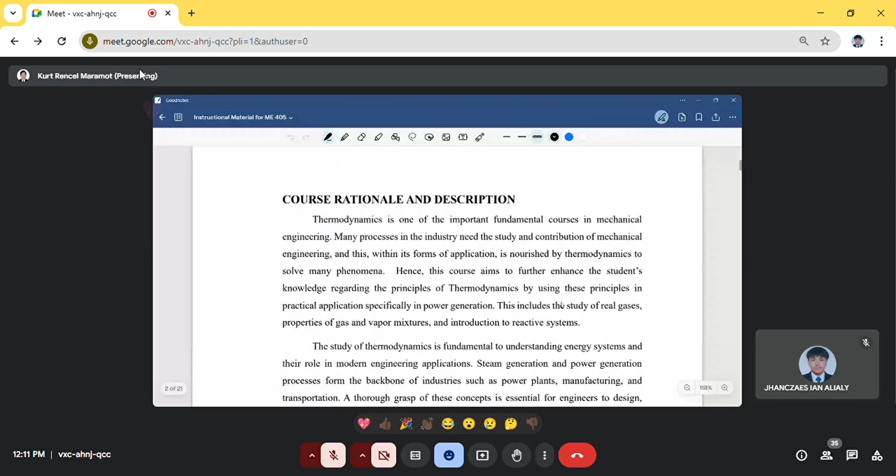So thermodynamics is one of the important fundamental courses in mechanical engineering. Many processes in the industry need the study and contribution of mechanical engineering, and this, within its forms of application, is nourished by thermodynamics to solve many phenomena. Hence, this course aims to further enhance the students' knowledge regarding the principles of thermodynamics by using this in practical application, specifically in power generation.

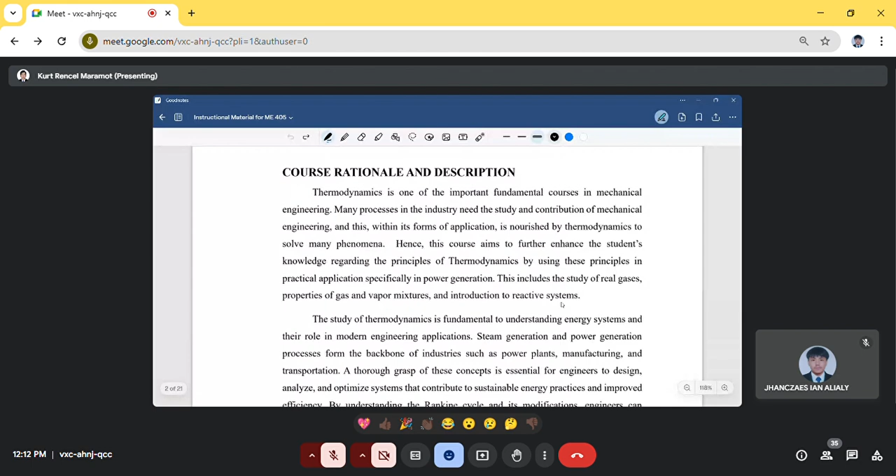This includes the study of real gases, properties of gas and vapor mixtures, and introduction to reactive systems. At the same time, the study of thermodynamics is fundamental to understanding energy systems and their role in modern engineering applications. Steam generation and power generation processes form the backbone of industries such as power plants, manufacturing, and transportation. A thorough grasp of this concept is essential for engineers to design, analyze, and optimize systems that contribute to sustainable energy practices and improve efficiency. By understanding the Rankine cycle and its modifications, engineers can identify opportunities to enhance performance and reduce energy losses, addressing critical global challenges such as energy security and environmental impact.

So in Thermo 2, the first part is a review of the thermodynamic cycles we discussed in Thermo 1, namely the Carnot, Otto, and Diesel cycles. Those three are solely focused on engines of vehicles or automobile engines.

So here in Thermodynamics 2, our main focus after reviewing those cycles is power generation—cycles that correspond to power generation. That's our Rankine cycle. That is the basic form or the basic cycle for power generation that is used.

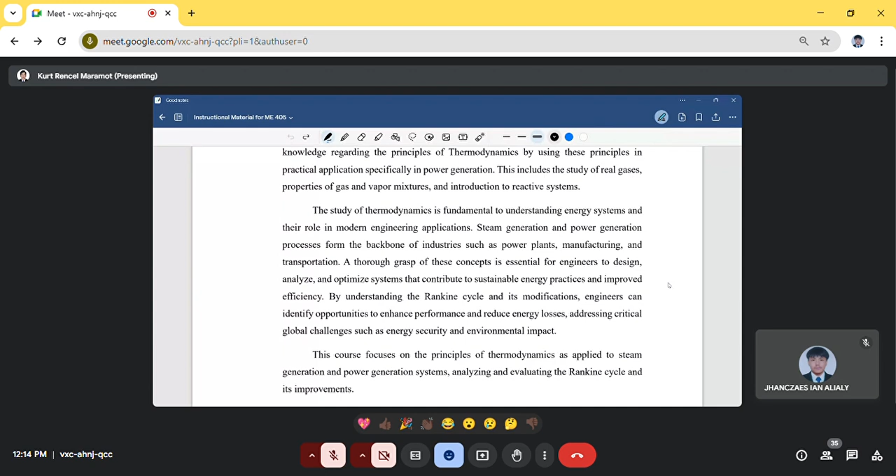So to start, we have here Chapter 1, Thermodynamic Cycle. Thermodynamic cycles are used to explain how heat engines, which convert heat into work, operate. The application determines the kind of cycle that is employed in the engine. The thermodynamic cycle consists of a series of interrelated thermodynamic processes involving heat and work going in and out of the body, simultaneously changing pressure, temperature, and other changes in body state, and eventually returning to the initial state.

So for our thermodynamic cycles, as we discussed before, we know we have parameters like heat and work that we analyze in a cycle. Then, for it to become a cycle, we need to return to the initial state. If you recall the Carnot, Diesel, and Otto cycles, we have 4 state points there, and we always return to point 1.

So state quantities depend only on the thermodynamic state, and the cumulative variation of such properties adds up to 0 during a cycle. Process quantities or path quantities, such as heat and work, are process-dependent, and cumulative heat and work are non-zero. The first law of thermodynamics dictates that the net heat input is equal to the net work output over any cycle.

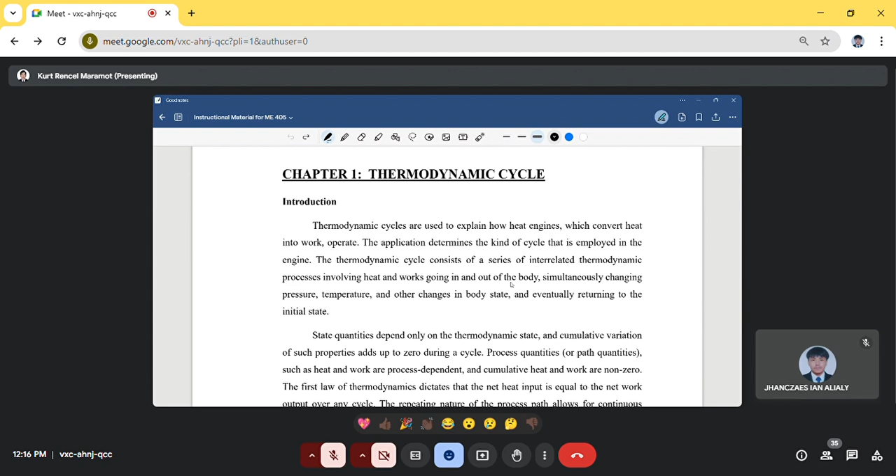So the repeating nature of the process path allows for continuous operation, making the cycle an important concept in thermodynamics.

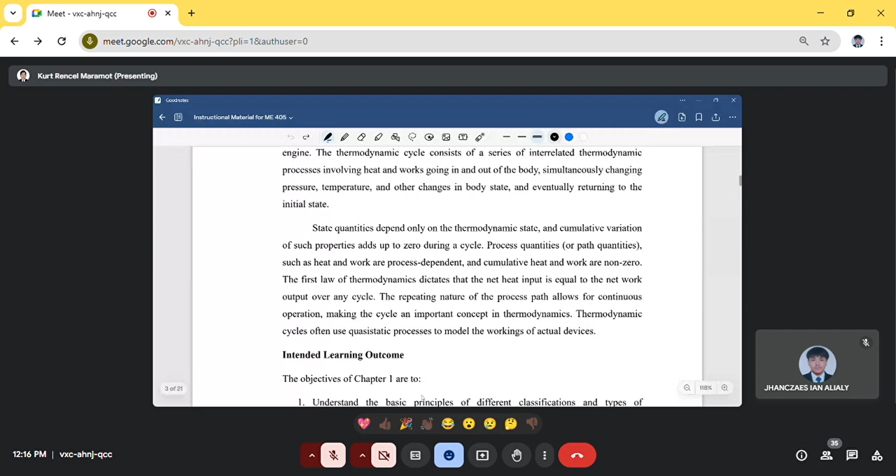So our thermodynamic cycles often use quasi-static processes to model the workings of actual devices. If you remember the definition of quasi-static from last time, our process occurs in a very slow manner so we can keep up in analyzing the actual work of an actual device. So that's still our quasi-static process or quasi-equilibrium.

Then our process quantities, or path quantities, are simply the drawing of our cycle—how the whole cycle is formed because of the path quantities or process quantities. So these are the lines of our cycle, the path of the cycle: from state point 1 to 2, 2 to 3, 3 to 4, and 4 to 1.

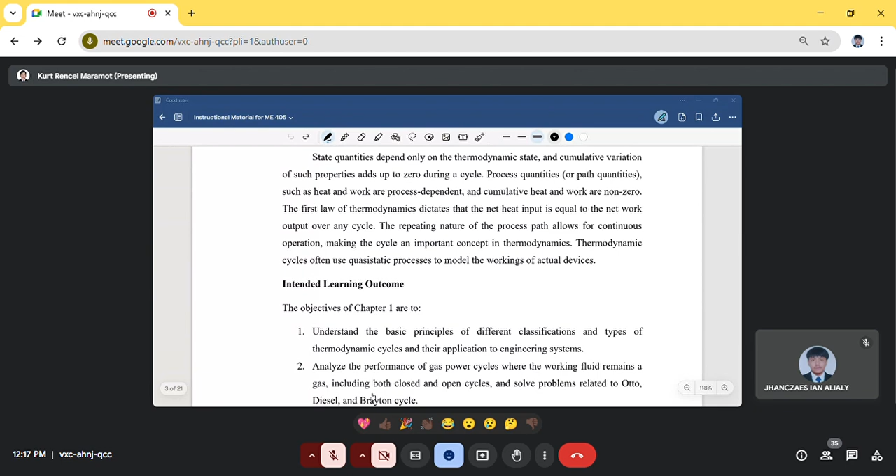For the intended learning outcome ng chapter 1 natin, we have 3. First, we need to understand the basic principles of different classifications and types of thermodynamic cycles and their application to engineering systems. Second, to analyze the performance of gas power cycles where the working fluid remains a gas, including both closed and open cycles, and solve problems related to Otto, Diesel, and Brayton cycles. Third is to develop and apply simplifying assumptions and perform second law analysis of gas power cycles, identifying key factors and solving problems to enhance understanding of cycle efficiency and operation.

So sa chapter 1 natin, may problem solving pa din tayo under ng thermodynamic cycles. Ang bago sa inyo dito is the Brayton cycle. Sana yung Otto, Diesel, and even the Carnot ay medyo fresh pa sa inyong utak kung paano siya isolve and yung analysis niya, kasi madadagdagan tayo ng Brayton pero same process lang naman halos yan sa Otto. That is for the intended learning outcomes for this chapter.

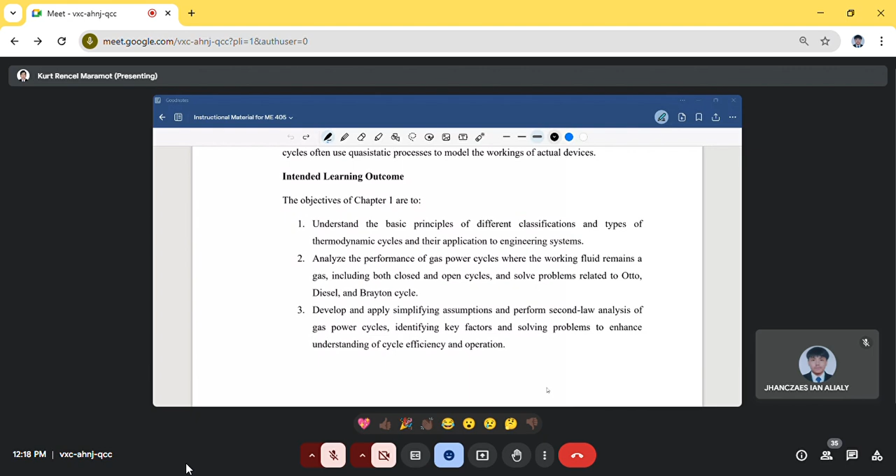Okay, so now we are going to discuss the classification of thermodynamic cycles. Thermodynamic cycles are very essential in our energy systems. We use it to describe the processes which convert heat into work or vice versa. So we can classify our thermodynamic cycles into power cycles and refrigeration cycles, with further distinctions between open and closed cycles, and by the working fluid used.

Pag power cycle, ito yung mga cycle that we are using for power generation. Typically the Rankine and Brayton cycle yung types ng power cycles. For refrigeration cycles naman, we have vapor compression and absorption. Yung refrigeration cycles natin, siya yung ideal cycle sa components ng isang actual refrigerator.

So yung open and close, ito yung discuss natin before. Pag open, yung working fluid natin ay nare-renew every start ng cycle. Pag close naman, na-recirculate tayo ng working fluid. Then yung working fluid natin, it can be either steam, air, or refrigerants. Okay, so yun yung mga classification, depende sa cycle and working fluid na ginagamit.

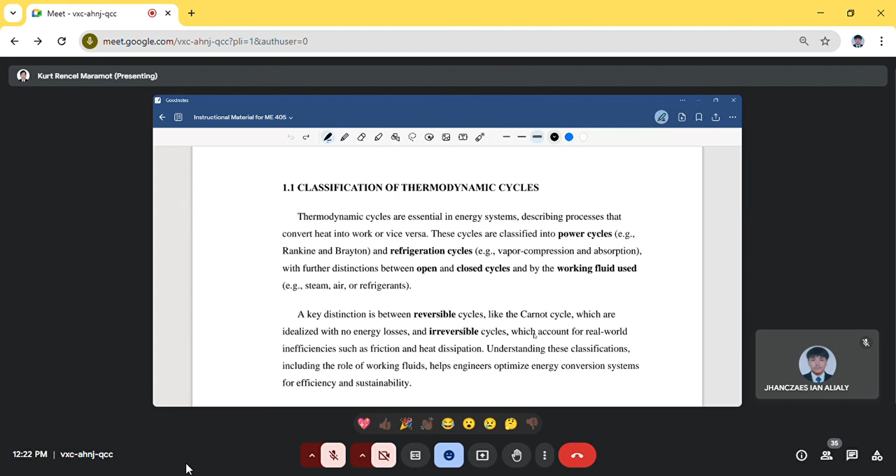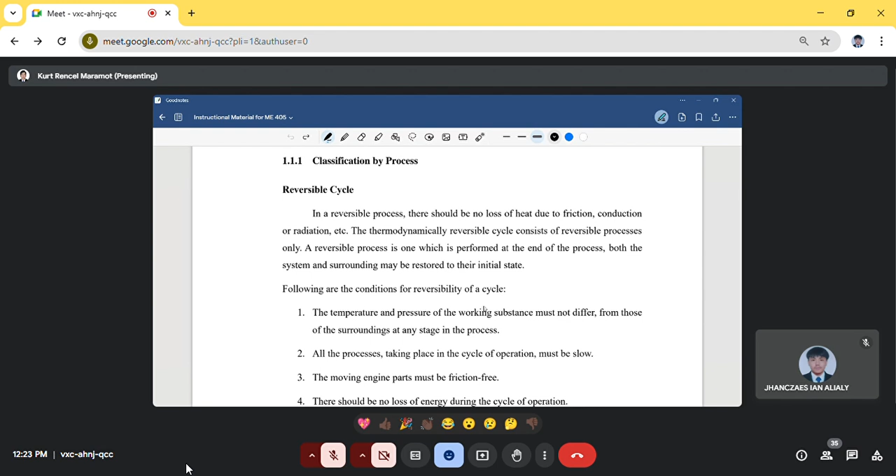So first, yung classification natin by process. Let's start with having reversible cycle. Sabi daw, under a reversible process, there should be no loss of heat due to friction, conduction, or radiation. Thermodynamically, a reversible cycle consists of reversible processes only, which when performed at the end of the process, both the system and surrounding may be restored to their initial state. So for us to have a reversibility of a cycle, these conditions ay kailangan masunod.

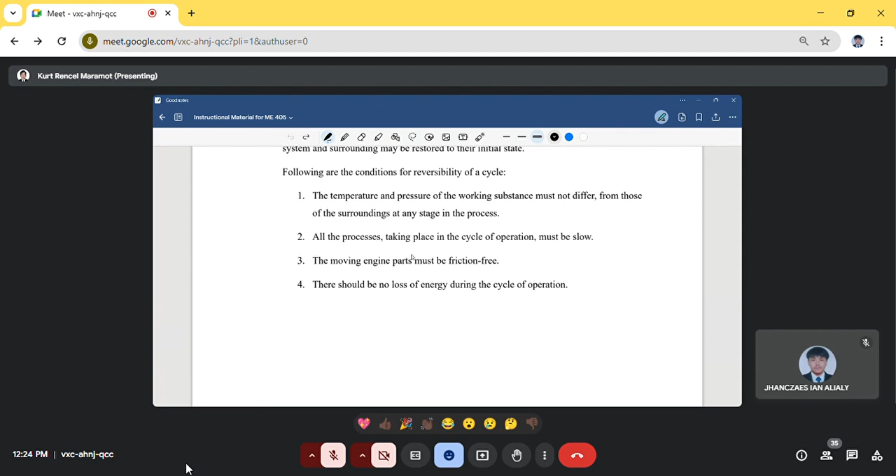First, we need to have the temperature and pressure of the working substance must not differ from those of the surroundings at any stage in the process. Second, all the processes taking place in the cycle of operation must be slow — ito yung quasi-static manner natin or quasi-equilibrium, dapat it must be slow. Third, the moving engine parts must be friction-free and there should be no loss of energy during the cycle of operation. So under the reversible cycle, wala dapat tayong friction loss.

So kailan lang ba tayo nagkakaroon ng friction loss? Yung friction naman, nangyayari siya depende sa movement ng equipments natin, yung parts ng equipment. So pag nag-move yun, somehow nagkakaroon tayo ng friction between two objects or two parts. So even the flow of the fluid, nagkakaroon din siya ng friction, yung friction ng flow ng fluid doon sa pipe, sa loob ng pipe, may friction pa din tayo doon.

Matatawag. Okay? Then yung conduction or radiation, siya naman yung bahala in terms of heat transfer. Kasi if you remember, yung discussion natin last sem about heat transfer, we have three ways to transfer heat, that is conduction, convection, and radiation. So yung conduction at radiation dyan ay para sa heat transfer natin. So it's heat transfer kung papasok man siya, surrounding to system or system to surroundings. So hindi natin siya ina-account. So wala tayong heat loss between the system and the surroundings para masabi nating reversible cycle. Okay, so that is for reversible cycle.

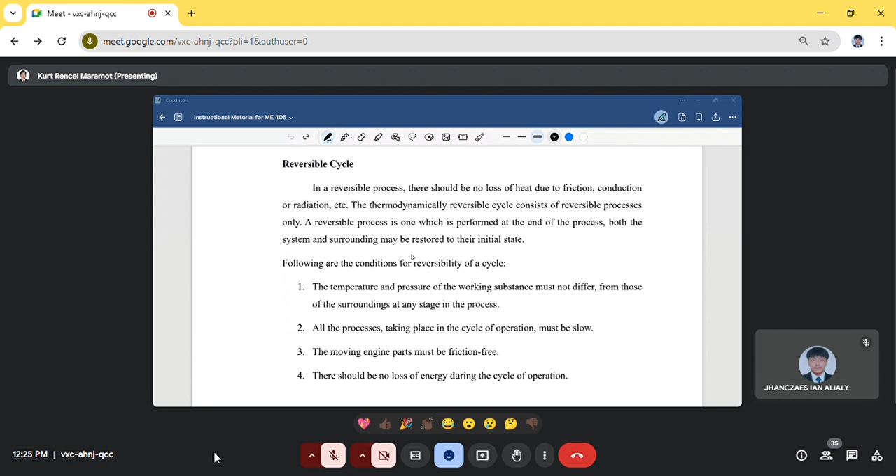Next natin is for the irreversible cycle. So kanina nga, nung sinabi natin na ang reversible ay kayang ibalik on its initial state, okay? So ito naman, hindi na natin kaya pang ibalik yung process. We cannot reverse the process. Kaya siya tinawag na irreversible process. So nangyayari ito because of the heat loss due to friction, radiation, or conduction.

So meaning to say, kung nagbigay tayo ng 100 joules of heat entering, and the 10 joules of it ay naging heat loss due to the friction or heat loss. So yung 10 joules na yun, hindi natin siya kayang ibalik sa initial state as the heat added. So hindi na siya kayang ibalik kasi losses na nga nawala na. So basically, 90 joules na lang yung napakinabangan natin. Meanwhile, yung 10 joules ay di nga yung losses. So hindi na siya kayang ibalik. Okay po ba?

So, yun yung irreversible cycle ng mga hindi na kayang ibalik. So, ang tiwala pag nasira, hindi na po kayang ibalik yun 100%. May nawala na dun. Ano? So, wag pong magbe-break ng trust. Okay? So, in practice, most of the processes are irreversible to some degree. So, yung main causes nito ay yung irreversibility are as follows.

Una, yung mechanical and fluid friction. So, yung sabi ko sa inyo kanina, even the flow of the fluid ay nagkakaroon din tayo ng friction nun. Okay? So, yung unrestricted expansion since in actual settings naman, we cannot control all of the energy entering or leaving the system. So, there may be some unrestricted expansion, okay, due to the imbalance of forces or energy. Then heat transfer with a finite temperature difference. So in a very minimal, okay, so we can still have heat transfer or heat losses, no, between the system and the surroundings.

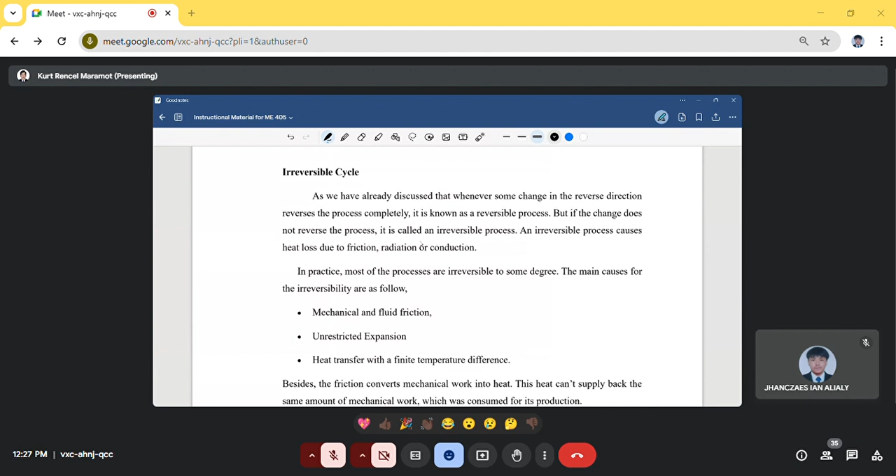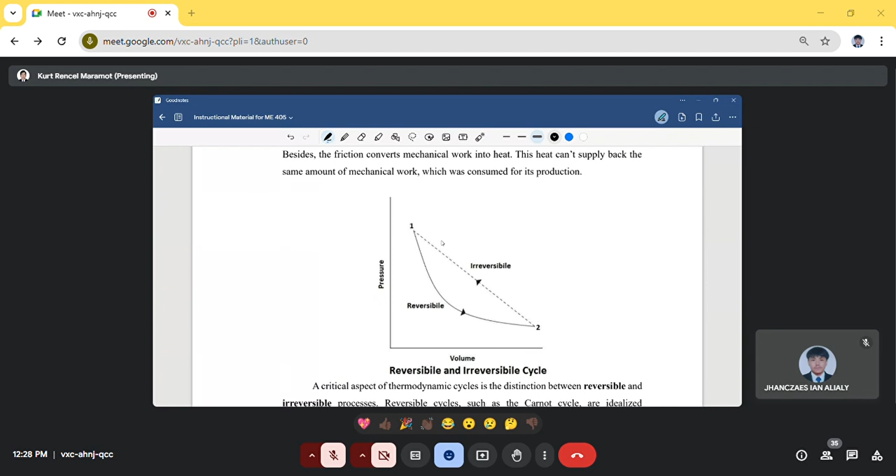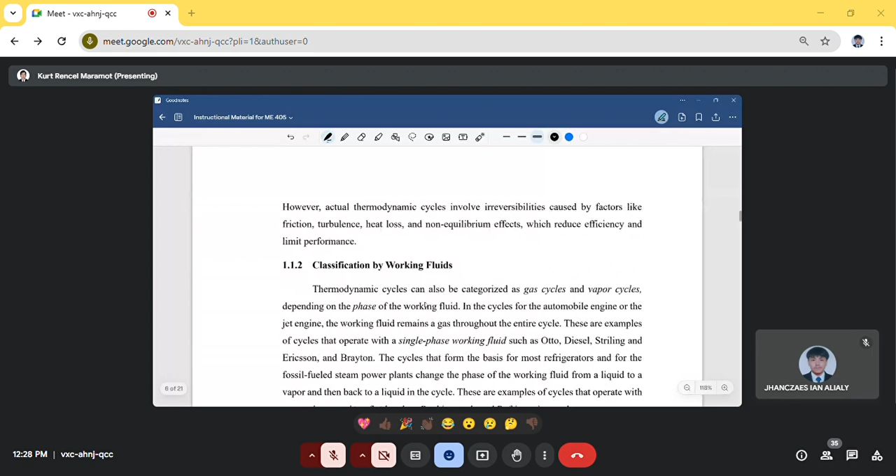So this is simply a summary between the reversible and irreversible cycle. Okay, so next natin is classification by working fluids. So yung classification natin by working fluids, so it's either gas or vapor cycles. So going back last sem, no, nakafocus lang tayo sa engines which are typically using air as the working fluid. Kaya meron lang tayong gas cycles, no? Last sem. So, gas cycles lang yung meron tayo.

Then yung classification natin by working fluid, saka depende din sa phase ng working fluid na ginagamit. Kung kay gas cycle, no, kung kay gas cycle, nagre-retain siya na air pamula sa point 1 up to point 4 balik kay point 1, air at air pa din yung ginagamit natin ideally. So, under siya ng single phase working fluid. Kagaya ng Otto, Diesel, Stirling, Ericsson, and Brayton. No, meaning, hindi nagbabago yung phase ng gas or ng air na ginagamit natin during the whole cycle or process. So, single phase working fluid.

Ngayon naman, sa thermodynamics 2, dito nyo na mamimit yung vapor cycles natin, which typically use steam, okay, or water vapor. So, yung steam, alam naman natin kung saan siya galing. Saan siya galing? Ang steam. Galing siya sa...

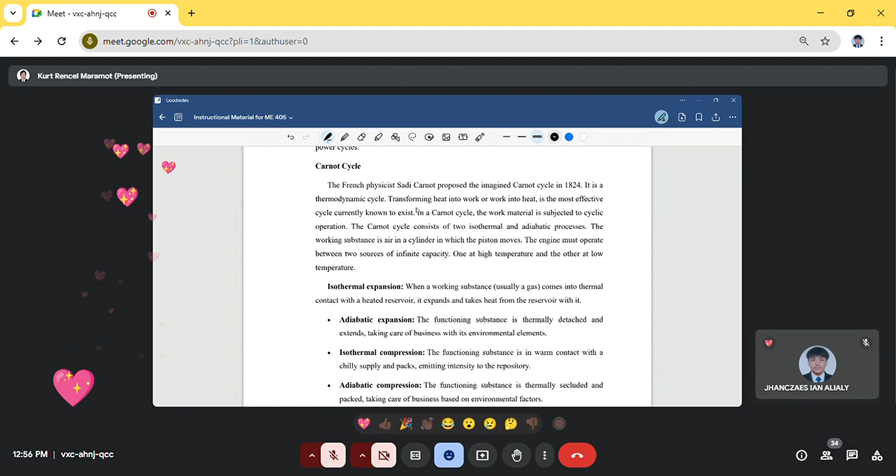Hello. So, continue na tayo. Nandiyan na ba lahat? Kabalik na. Okay. So, ito naman again is just a review ng thermodynamic cycle. So, let's start with Carnot cycle.

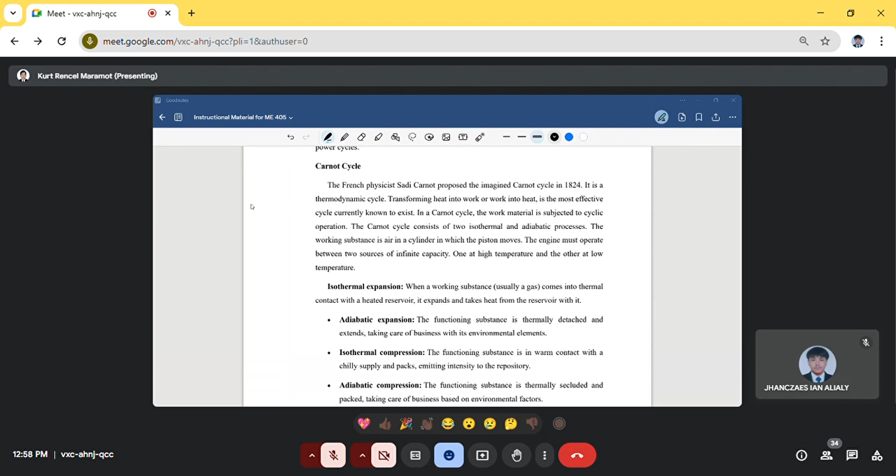So dito, the Carnot cycle can be addressed on a temperature entropy graph or TS diagram natin. So, yung thermal efficiency natin ay nag-i-increase with the average temperature at which heat is added to the system, or nag-i-decrease with the average temperature at which heat is rejected from the system. So, ito yung one of the formulas ng efficiency ng Carnot cycle

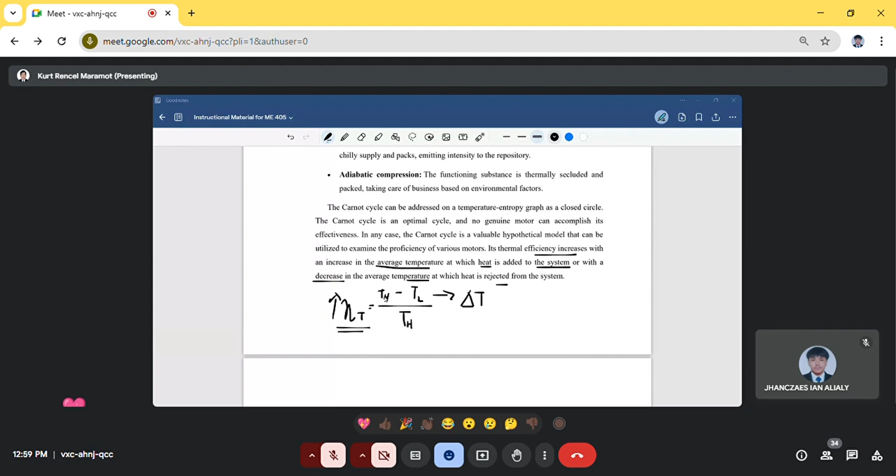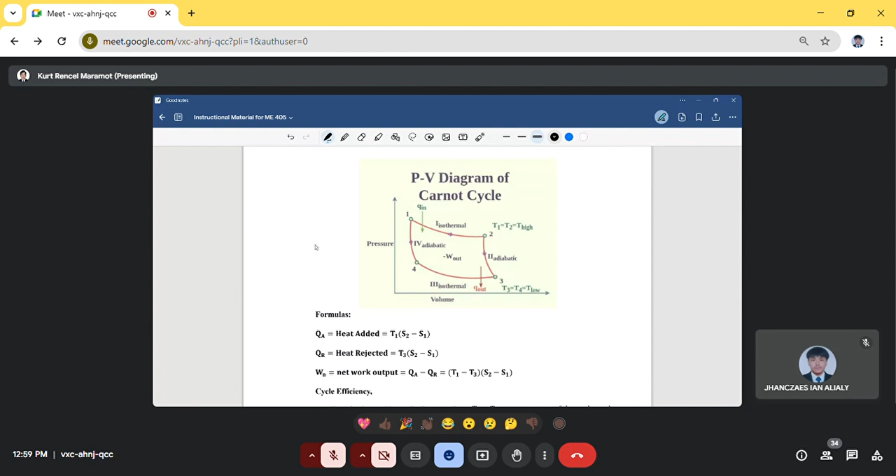Naintindihan? Okay. Then, ito din yung ating TS diagram. PV diagram yung nandito, kaya naka-curve. Pero madali naman tandaan yung TS diagram natin. Simply, this is our entropy and our temperature. So we have here a rectangle. So we have points 1, 2, 3, 4.